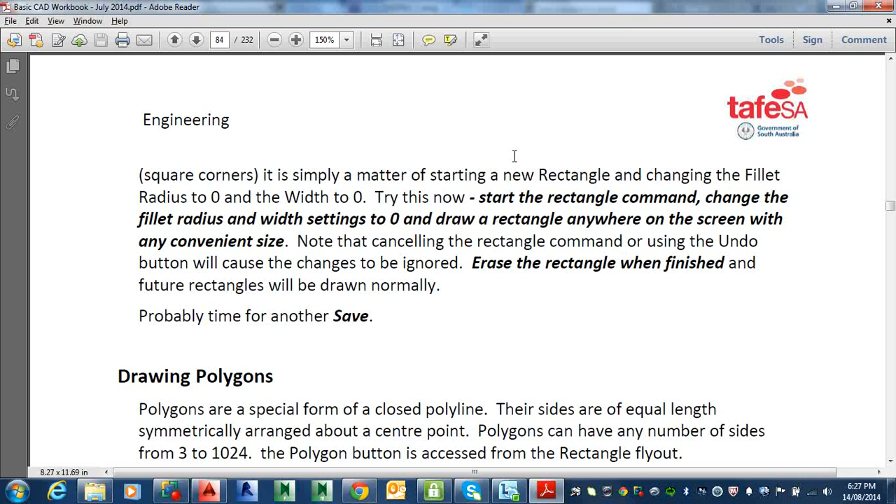Okay, page 84. I just want to touch on this one here. It asks you to use the snaps and the grid and all that sort of stuff. In reality, I don't know anybody that works with a snap and the grid out there. So this will probably be the first and last time you use this sort of idea.

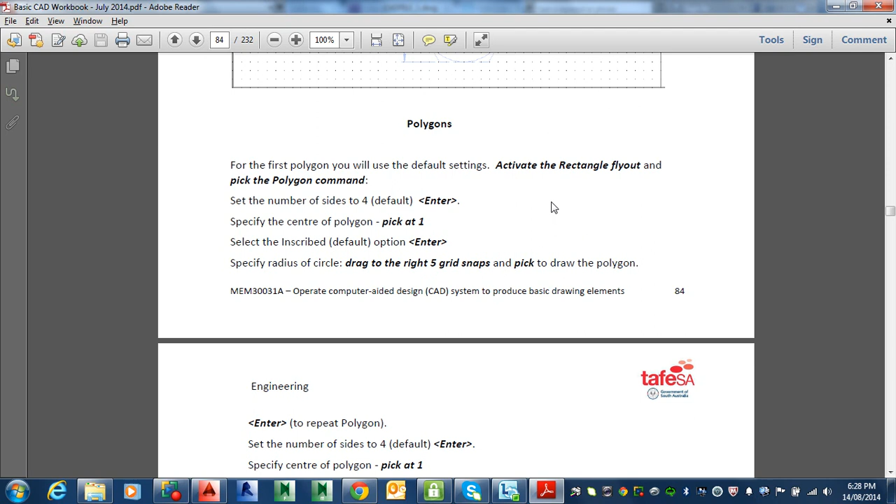Nevertheless, it's good to know it's there. I, in fact, did learn how to use this when I did pretty much the same course as you guys decades ago, but I only had to use it once for a client of mine. Anyhow, I'll just go in here.

So basically, what this one is trying to do is getting us to draw a few polygons, and then by the end of it, he wants us to do some other things to it. It has got a finished product, which I can't see in here, but that's on number 13.

The finished product basically tells us we have to use the polygon, I think. Oh hang on, snap to center. No, it's not doing that anymore, which is good. That's fine. All right, I'll explain that.

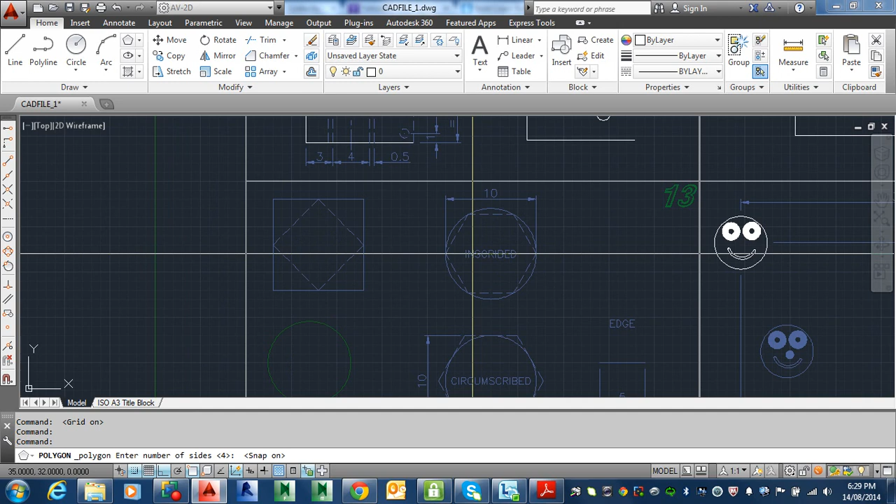Basically, with the polygons, all we have to do is tell it how many edges there are. This one is only 4, so it's really just almost like a square. Enter, and it's asking where we're going to start it from. All right, here - oh, I missed it, try again. So that's the problem with this. All right, 4 sides, click here.

All right, is it inscribed or circumscribed? I don't know. How am I meant to know what it is? Okay, well, basically, you've got a 50-50 chance of getting it right. So it's the radius he wants, and the radius is actually in there. So I'm guessing it should be inscribed because I can imagine the circle going around it.

But it's just a bit of practice, really. Let's just try it out. Yeah, there you go, so that's in there, like that. So that sort of worked.

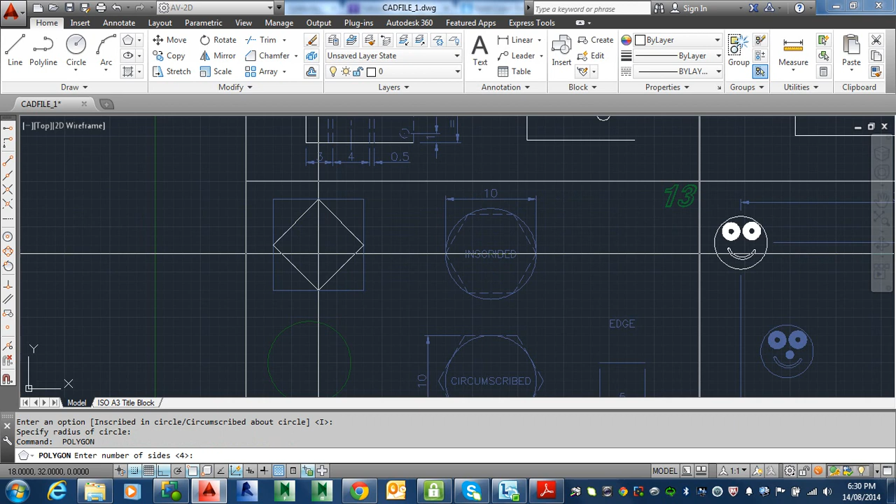And if you wanted to do another one, 4 sides again, but this time we're going to go center here, circumscribed. So there, and I come back here or even up there. See the difference - I didn't change anything. I still clicked on the same spot, but if you can imagine a circle going around here...

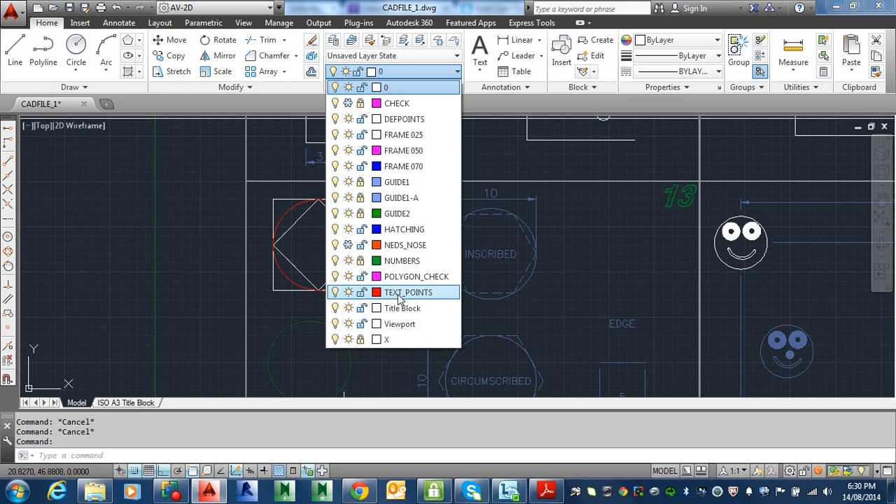In fact, let's not imagine the circle, let's put a circle there. All right, I'll just draw a circle there, and I'll just change the color so you can see what I'm doing. Is there a different color here? That'll do, red. All right, so that's a funny looking circle.

Okay, so basically, the first one was inscribed, which means inside the circumference of the circle. And the other one is circumscribed, which means it's scribed, or it's hugging, or it's drawn around the circumference. All right, so that's basically how the two work.

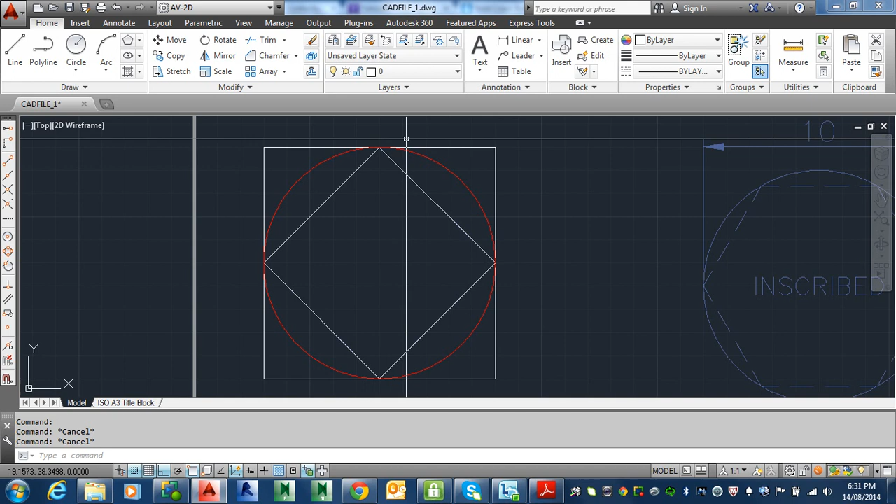So if you went to buy a polygon or hexagonal table from somewhere, if you got one that was inscribed, it will be smaller than if you got one that was circumscribed, for example.

If the table was 1200 diameter, then it depends what it is. It could be bigger or smaller depending. One is measured basically from point to point, the other one is measured on the flats. Eventually you're going to get the hang of it.

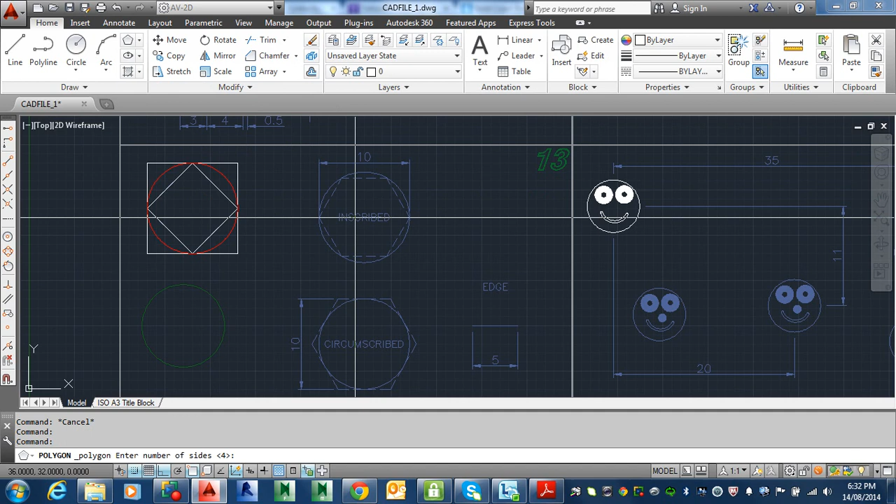All right, so if we go to this one here, I'll just do one more and then we'll leave it at that. We're doing the polygon, which is hidden behind usually the rectangle. There we go, so this is just snapping. Basically, if I move this along, it just snaps to a point there.

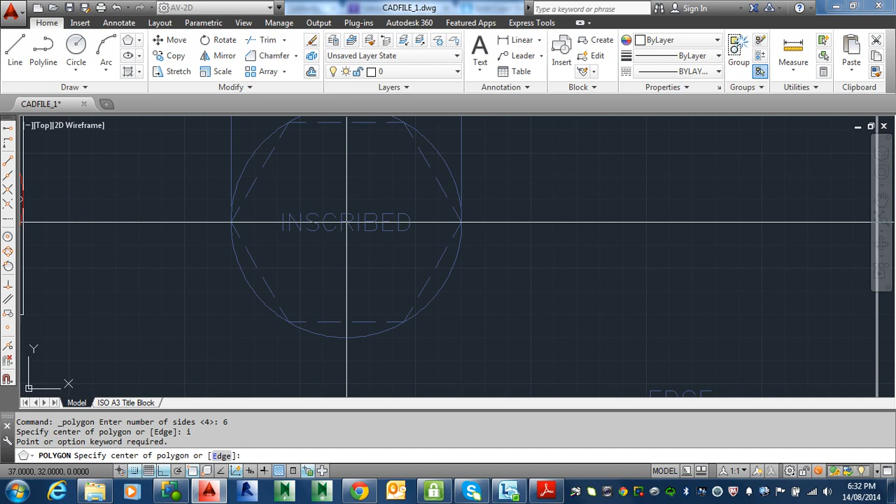That's about where it should be, I think. And then this one is going to be 6, and we're going to go inscribed, I for inscribed. All right, oh, I didn't do the center, sorry, I thought I did. I for inscribed, and then okay. So depending where you go, see how it changes.

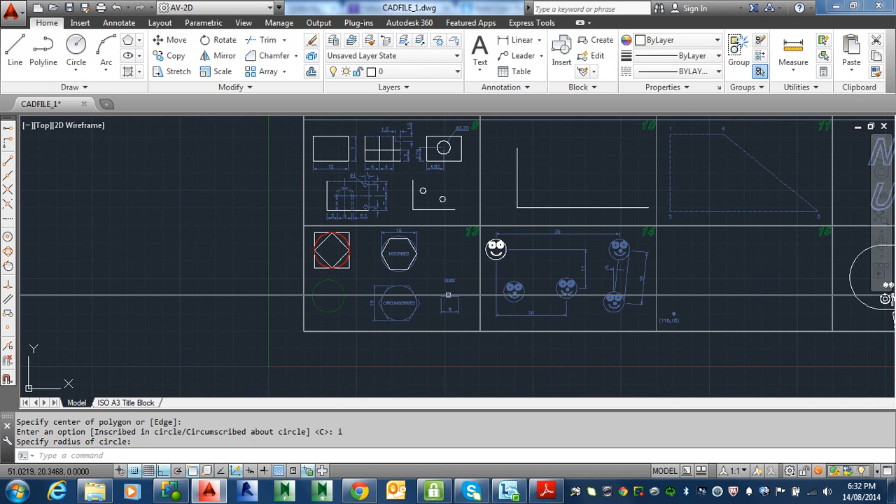If I go up this way, it goes like that. But if I want to go over here, it's like we want it to be. All right, so that's that. So we'll just, there's another option with the edge, you can do that as well. I'll leave that there for now.

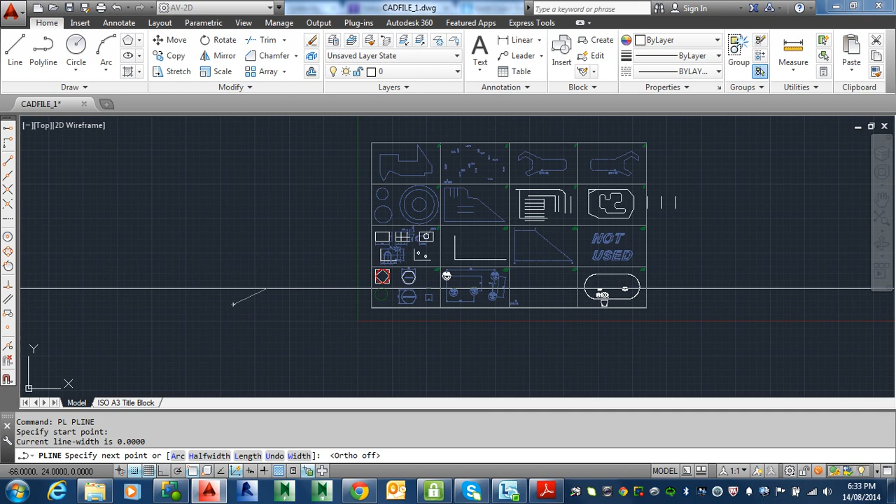But what I wanted to show you with the polylines as well is this thing here. You can actually, if I go polyline, and I go like that, I'll just draw a polyline, just so you know, F8. Just draw how they also work, how you can get some shapes, because these polygons here are polylines anyway. So if I just do that, if I use this other thing here called Polyline Edit, I can do certain things to a polyline.

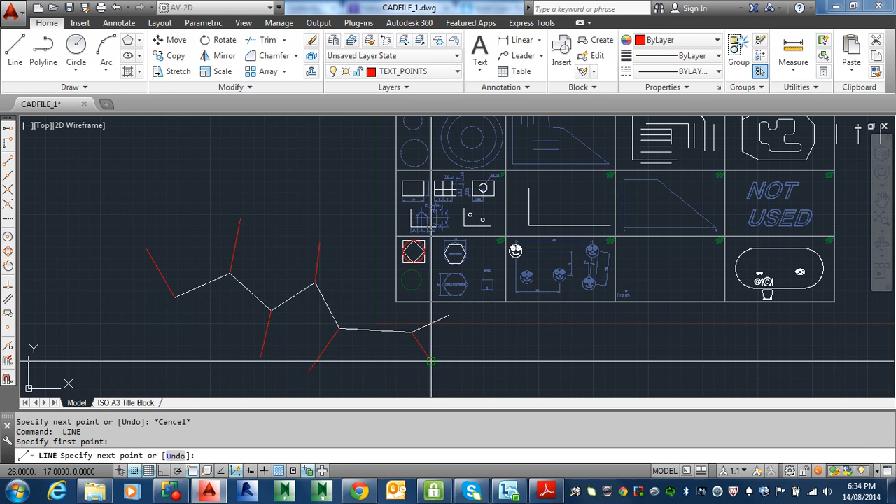Now I want to show you the difference between fit and spline. All right, so if I draw a line here from here to here, just a line from there to there, and just where the points are, just main points. Okay, so if I go polyline edit, PE is the command, or you can get it from here.

All right, and I click on here, I can go F for fit. And the polyline follows, if I escape that and I click here, it goes through the old vertices, or the old points that we had there.

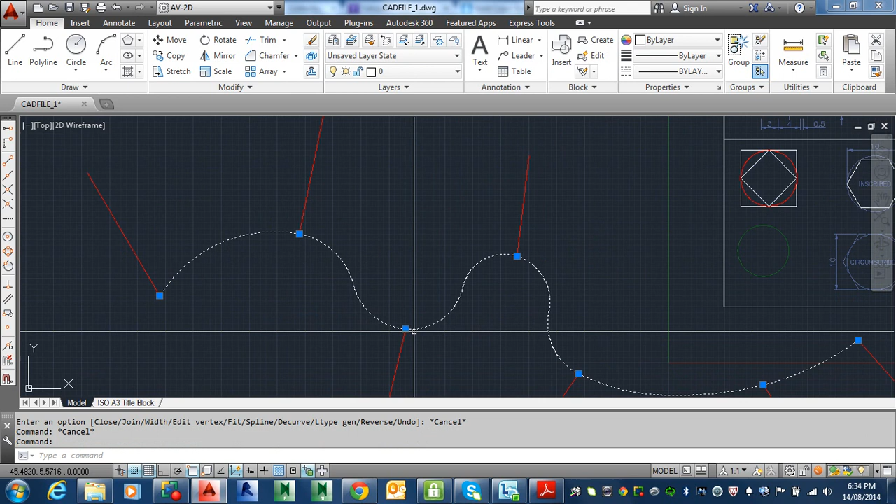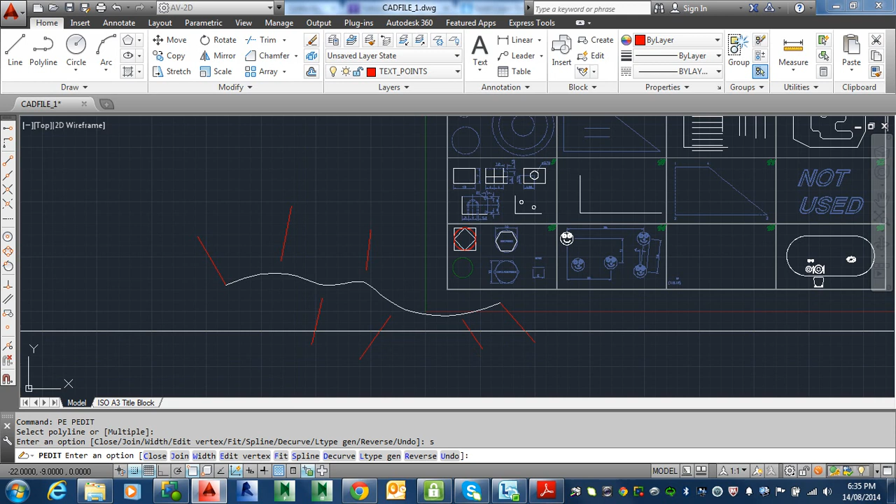All right, if I go polyline edit, PE, I'm just going to type it in, and go fit. Oops, I'll just do it first. Hang on, undo it. Okay, go PE, and we'll go here, and we'll go spline this time, sorry. See how it's an approximation? The only thing that's actually on there is the beginning and the end. But if you click on there, you can see that the control points are still there. But you just get a different freeform, that's all.

A while ago we were getting you to do this with this thing here. I'm glad we changed it now. But we used to get you to go polyline edit and click on here, and then go F for fit, and really all you ended up with was a circle. It really doesn't actually show you what you're trying to do. It was only ending up with a circle.

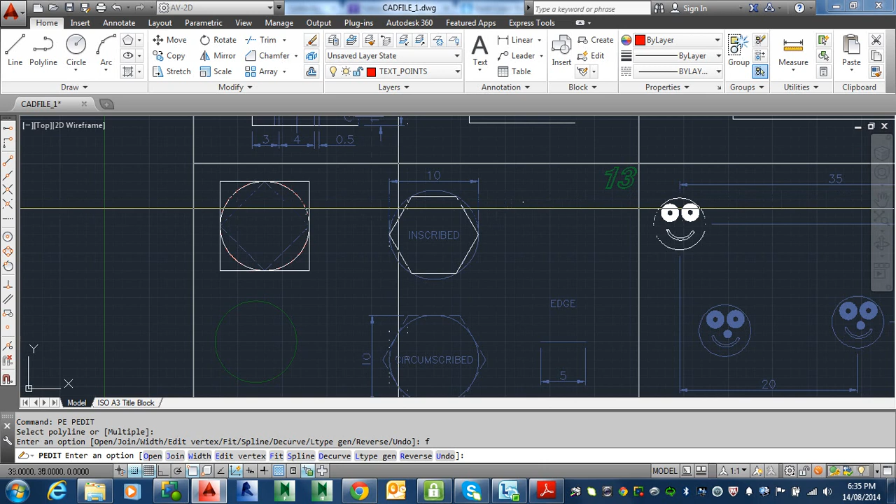But I thought I'd just add that in because we used to have it in there, but it really didn't give you the right idea of what it was doing. So now you're just drawing those and leaving in there. But there is a polyline edit command which can modify any polyline, including polygons. All right, so I thought it was just related with that, so I thought to throw that in. All right, thank you, I'll leave you to it.